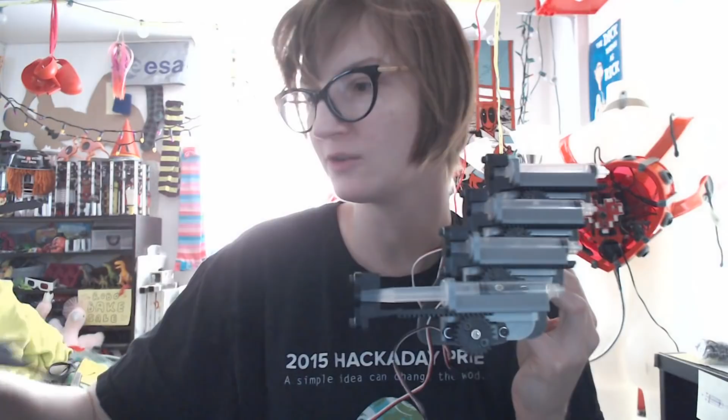But the stipulation with this is that the plunger of the rack and pinion does poke out, maybe like 2.5 to 3 inches. I don't use imperial, but let's figure this out with calipers. About 60 millimeters. So these need to not collide with one another in the middle of my back.

So that's one stipulation of the thing I designed today. The other is they can't collide with, I'm gonna call it the stock mount. I'm basically going to have a stock coming out of the middle of my back. These can't collide with the stock mount either.

If I go ahead and tilt this, you can see there's a pretty decent amount of depth to it. As you go towards the bottom of the rack, that mounting junction can probably go in between, in this empty space right here. It still has to clear the plungers from the syringes up here, but they're out farther, so it probably won't be quite as big of a deal. They just need to clear something that's going to be mounted about there. But we'll see, this is going to get interesting.

And it all needs to be comfortable, so this has to go on my back and actually not be a pain in the ass to wear. A lot of these augments I'm creating are miserable to have on my body for any period longer than about 15 or 20 minutes, so I'm trying to be a bit more mindful of how they feel once they're on my flesh meat. I'm going to try and be mindful of the design.

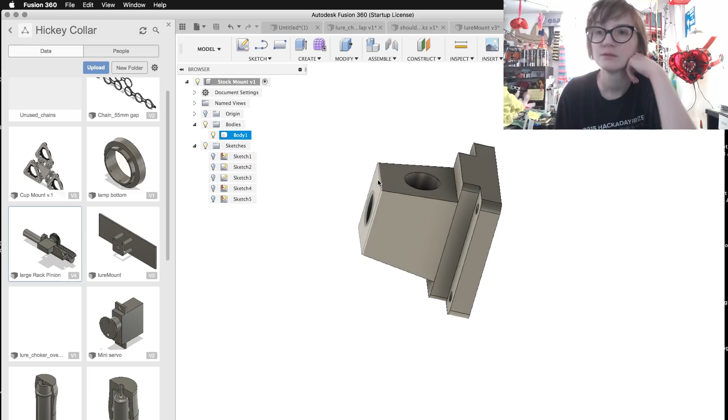Alright, back to Cadville. Alright, so I have this piece. The way that it's going to have to mount is that this face right here is going to go facing towards my back, and this face right here is going to be facing away.

And if I switch over to... There we go. So I made some spacers here that will close that gap, and there's the stand-in mounting plate. This is so far away from the mounting plate because in order for this thing that's coming out of this hole right here to clear up and over the back of the plate, it has to be this far away from it.

So I made kind of a spacer piece right here. This is probably going to be connected to or part of the plate.

They will be one in some capacity, so these spacers and this piece are just bracketing onto it. And then perhaps this block is going to be what mounts onto the mounting plate. I'm not sure, but it does need to be that far away, and I don't think I have hardware that's long enough to span a spacer that's just the length of these two pieces.

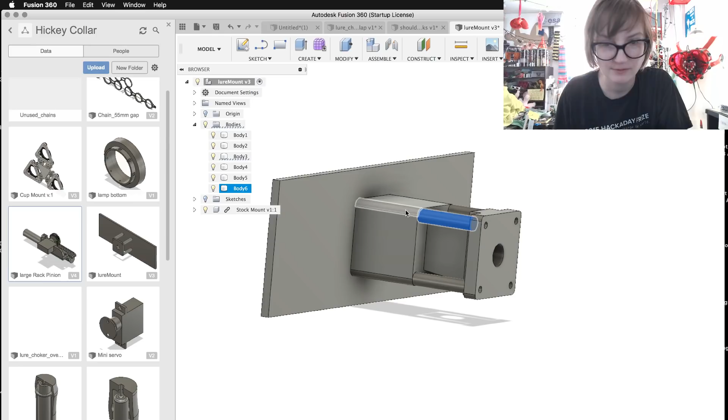Well, I can actually see. That is 78 millimeters of gap I would have to close. So I don't have hardware that long. I don't think that's a wise route to take anyway. So I'm not gonna do it.

And then on either side of this thing, this is the potential space where those racks are going to mount in some capacity. But I want to figure this part out first and make sure that I'm completely okay with it.

So this is going to be, since it's out so far, pulling on this quite a bit, which I hate that it has to be that way, but it does, which sucks.

To show you what I mean, I can actually probably go get the part. Let me show you what I'm working with, and you won't have to wonder what I'm talking about.

Alright, this mechanical arm right here. So at the bottom of it there's this thing, I don't know what you'd call it, and that is what goes inside of this hole. It has to go into it this way, so I can't spin this piece around and mount it here, because this collides with the lip of the mounting plate and it doesn't seat all the way inside. So it has to be situated thusly, which is okay.

Sorry. I'm so sorry. Cool.

Okay, I'm not gonna switch the cameras because apparently I forget to switch them back. I need to just get another screen. We have other screens, that's the thing, like we have the tools, we're just too lazy to set them up. There's a screen like right there. Okay.

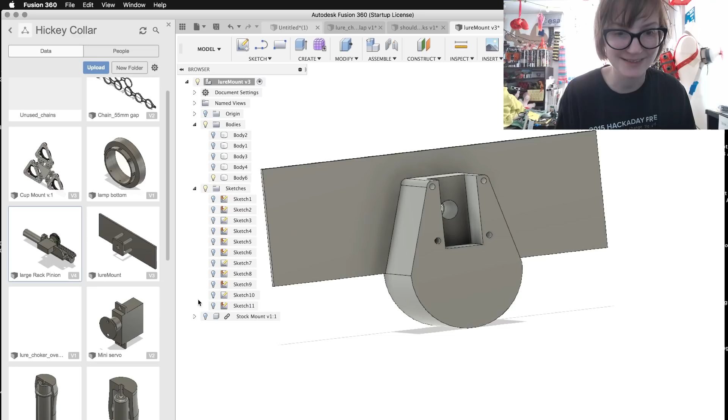Okay, so there's this really ugly blobby shape. Was that all the CAD I did for the entire stream? I didn't show it. Is that what I just did? Probably. Great. Alright, so this shape is this shape. I made that before I started streaming.

I'm trying to socket it into a mounting plate that has support underneath and support from behind, and I can stick hardware through these holes, and it's butted up against something on this side of the shape, and it's a happy thing.

So these two things marry together. This part slides in from the front into this little scoop, sockety thing, this little cavity I guess. So it shoves into the cavity, and then the hardware goes through these holes from the back, and it's just sort of in place.

The only thing I was concerned about, that I said you couldn't see because I'm an idiot, is the span of this is quite a bit. So the hardware would have to go from this face to this face, and that's like 91 millimeters, which is a lot. I don't know, do they even make hardware that's like 100 millimeters long?

Do you know, Mark? Do they make that? That's long for a screw, yeah. So they're going to be weak. So for an M3, probably not.

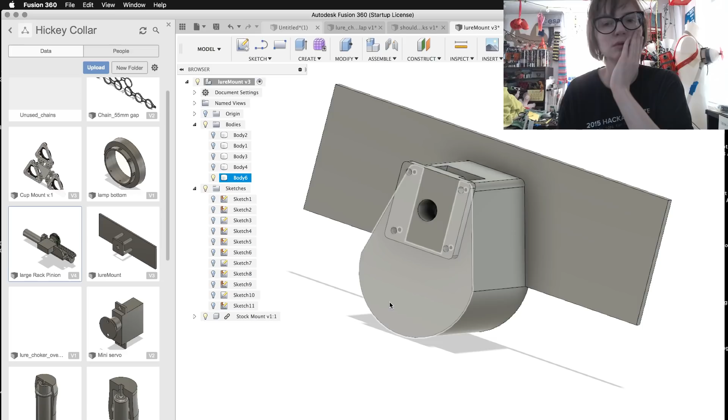But threaded rod, you can get threaded rod in any length, and then you're just going to have to put nuts or a cap nut at one end, and a little bit of Loctite, and you can create the nut-screw fastener that you're looking for. Make a nut. Yes, you can make nuts.

So this has to be this far away from the thing. Again, because the stock coming up and out of this big hole right here, part of it arcs back in towards the plate, and if I had the plate any closer, they wouldn't clear. So it has to stick back a little ways away, unfortunately.

I was trying to figure out how to shave off part of this so that it's just a shelf holding it up and not a giant massive... I don't know what you'd call that. Half of a cylinder, I guess?

I'm so mad that I did that. I've been getting so good about other things, like remembering to plug in the actual microphone. Stuff like that.

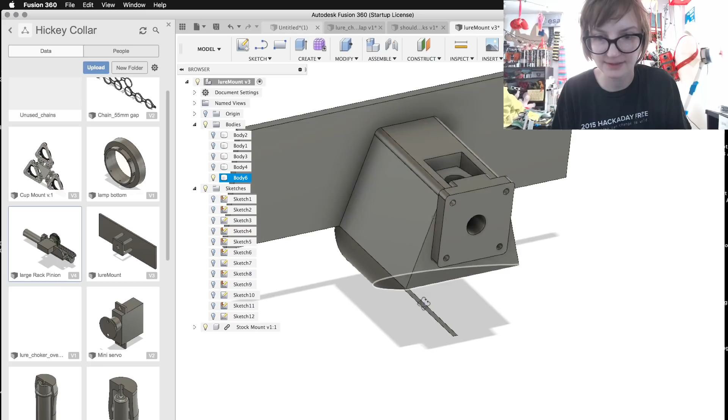Can I do this? Can I do that? I can do that. There's a little tiny oopsie piece. Just do that the ghetto way. That's not really what I wanted to happen, but can I fix that?

It's starting to look cool. Okay, that's a little better. Okay, yeah, I like that. That'll work.

Okay, so I have these two wing pieces on the side. Again, like I probably mentioned when I wasn't showing the screen, on either side of the centerpiece is where this thing is going to mount. It's probably not gonna be exactly this, but it's gonna be something kind of like this.

One of the ways of mounting it is to have it coming up off the shoulder blade like this, like an actual wing. The other way is to rotate it 90 degrees and have it coming up off the top of the shoulder, kind of like a wing but not really, like this, and then have another one going like this on the other side. So like this, or like this.

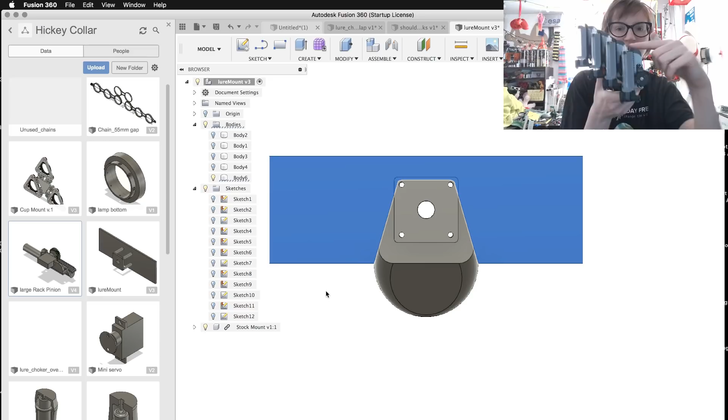The only problem with that is if they're going down, I kind of designed the edge of this assembly to look like a feather, and if it's angled in this direction, the feathers point up instead of out like this, which breaks the aesthetic. But function is more important than aesthetic at this point.

If the other way works, then that's what we're gonna do. I think I'm going to close and save this because it's referenced in another one of these assemblies.

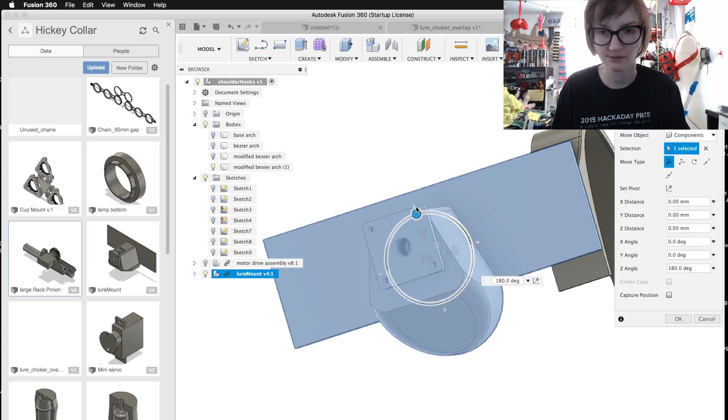And that's this. So if I wait for this to save and then I update it, it should pop in here and look appropriate. There we go. Oh, it is upside down. I never know how that happens when it happens, but it happens.

Okay, but anyhow, how are you guys doing, by the way? I asked this already in this stream, but I'm gonna ask again, and then check the chat.

Oh man, I just looked down and saw, 'Have you considered making noodle fly?' Polisqualis asked. I don't know, flying seems so much harder than walking, and walking is hard enough at this time. But maybe just attaching him to a giant quadcopter would be a faster and easier way to get him mobile at this point.

Thank you for supporting me in spirit, Vi. Oh, and again, sorry for the thing. Thank you for messaging me about it. I'm sorry I didn't check my phone, because that's not around me either.

I'm one of those crazy people that has a phone, but I don't keep it by me. In fact, I usually don't know where it is and it dies, and then I stop getting notifications to my computer, because my phone is dead somewhere in the house, and I have to go find it and charge it so I can leave it somewhere again. I've probably said this before, but it pisses my mom and my best friend off quite a bit, because they're always trying to contact me just to chat during the day, and if my phone dies, they're like...

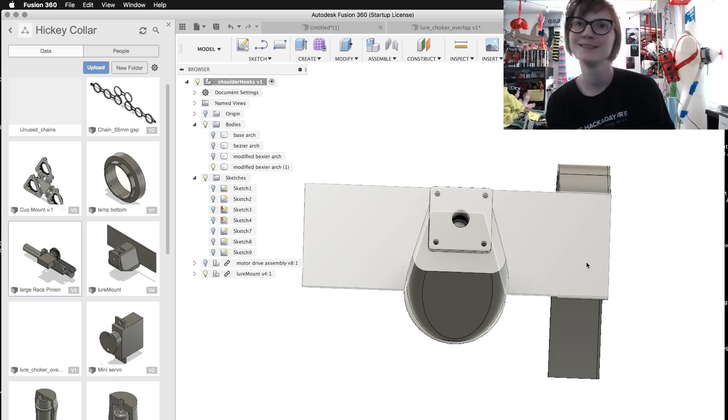I have so much lighting stuff. I have backlights for LCDs, lighting strips, halogen. What do you want? Something we can integrate. We have that light - that's a nice blue for daylight, and then do a warm one for night. That's what I would do if I were you.

No? Is it too much for you? Too much effort? No, not effort, I just like the natural light in here. I know you said you can mimic natural light, but then you need to aim natural light at your face. That's why I'm saying an LED light that's blue will match the outdoor blue light and you'll look fine. I'm in darkness, all right? You should think about that.

Okay, I'm gonna draw more.

So the other thing I've been knocking around in my mind, all this talk about lighting aside - streaming is... I envy people who have a second work setup just for streaming. Where could I work in this room? There's the space behind me for assembly, my bench for soldering, Mark's bench for soldering, and the main big table for assembly in the middle that's completely covered in stuff. Then there's Noodle's room right there, and my computer desk and Mark's computer desk. There's all these spaces and they're used, and they have good lighting because there's windows everywhere that light all the stuff.

But relocating things on the spot is difficult because there's no place to set stuff. We do have a bunch of lights in here - those blue ones we move around quite regularly. You could put them right here and aim them at you. They're really harsh, good for some lighting, but you want a diffuser, so make a diffused light out of what we have. We have diffusers, LED panels, all kinds of stuff. I would make something that fits on the desk, or get a second one and put it on the other side.

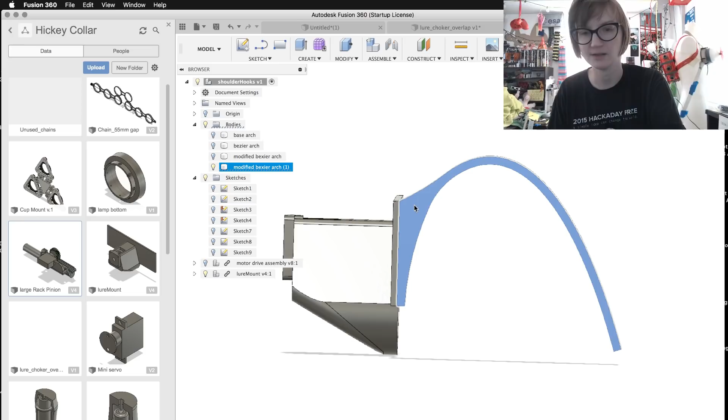Wow, I can hear myself. This is weird. Capture position. Alright, make cables. Alright.

So I drew something to explain something, and then I never explained what I drew. Let me go back. I drew this terrifying amalgam.

I mentioned lights. That's what I was talking about. I mentioned embedding some landing lights inside the plastic.

That's one of the things I can do since I'm 3D printing it. I can actually make it hollow and put some light diffuser material in there, which I think I might do because why the hell not?

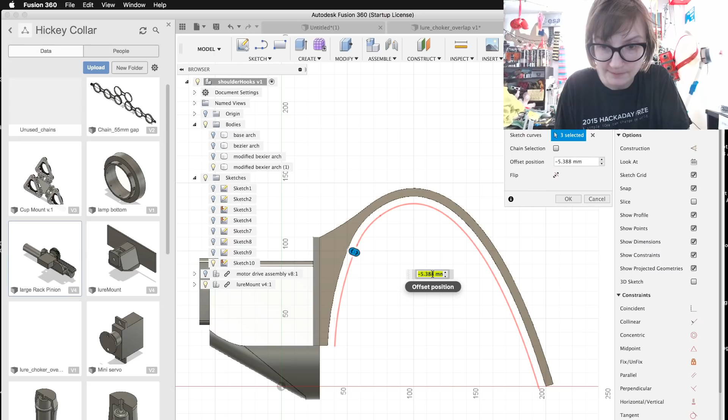Okay, so I said I'm gonna use 3mm aluminum. Aluminum, nom nom. Aluminum. Alright, I'm gonna go get my errands done.

Where are you going? Where are you going? We have banana bread. I think that will be my lunch.

Okay, so this thing that I'm drawing right now is going to represent my aluminum. Aluminum. And that can't be a fancy shape. That's just going to be whatever the stock is.

Are you going to extend? Oh, it did extend. We're not going to join. That's going to be a new body. Okay, so that's the aluminum.

Probably even change the color of this. Should we? Should I do it? Should I bother? Where are you going? Why?

What are you getting? Are there more? There's more? Are you fucking kidding me?

Getting back to the beginning of this stream, while we were getting warmed up, I mentioned this terrible thing that happened to us this week, this story about our door. What?

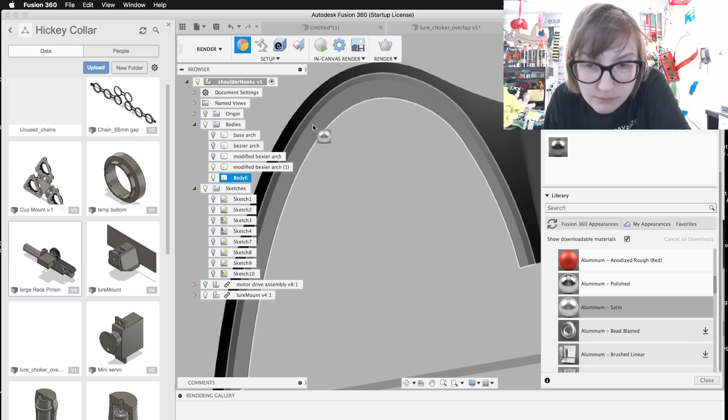Okay. Yay, now it's a different color, and I won't forget. So I think what I'm gonna start doing from this point on is I'm gonna start actually painting the parts that I know are going to be metal, the metal color, so that I can see what I'm printing and what I'm actually milling out of stock. If that makes any sense. Of course it does. Shh.

Alright, this big chunky piece is going to be printed, but the plate beneath it is going to be aluminum. Why are these separate entities?

Okay, and then I'm going to shut you off, and then I'm going to get rid of you. Wow.

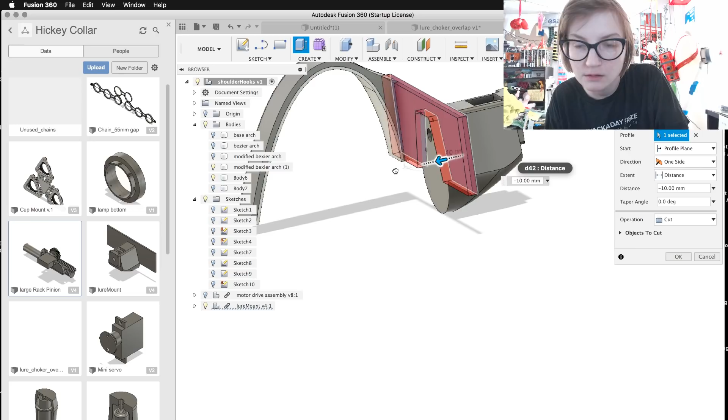Why is it not wanting me to do that? Cut. Huh, it does not like it. Interesting. I'm not entirely sure why it does not want me to do that.

No target body found to cut or intersect? Wait, really? Oh, it attached that. Oh. Wait, oh no.

Oh, that's because it's on a different... Oh, okay, that's this, that's a different thing, okay. So I can do that here, right? Right? I'm not losing my mind?

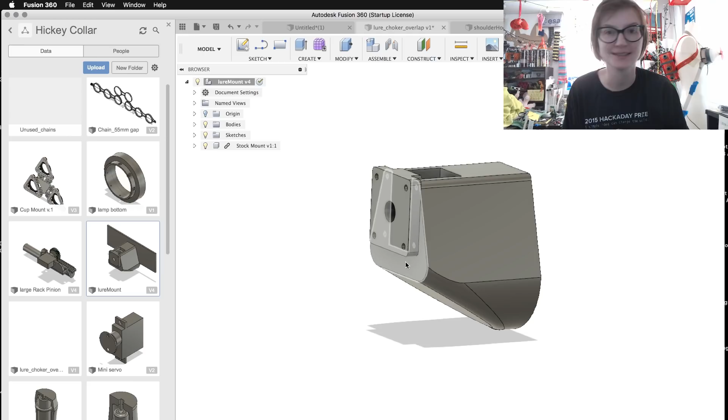Yes, okay, alright, fuck. I hate when I import shapes into assemblies and then I do shapes in those assemblies and then I try to edit something that's just been inserted into that file and it's like, what are you doing? That's a ghost. This is a ghost in that file.

Okay, so I tweaked that. It has holes. Probably put some holes down here too, but I'll do that later. Alright, let's save that. And then if we go back to this and we update it, this giant chunk will actually fuck off, finally. Sorry about that. I get confused so often.

Okay, so we can turn this back on now. No? Oh. Oh, okay, I see, I see what it's getting at. Okay. Okay, okay. Interesting. Huh.

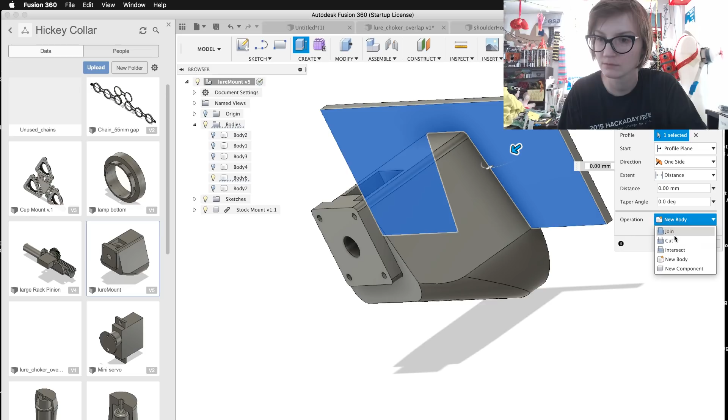Let's try that again. The confusion intensifies. I think that is what I wanted. Okay, so how thick is this? Five.

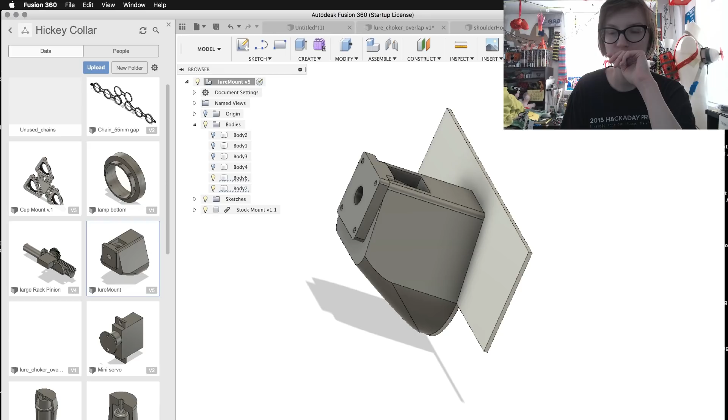So I'm gonna save that, and I'm going to update this, and hopefully it fixes or does what I think it ought to. Maybe? Cool, it did. That makes me happy.

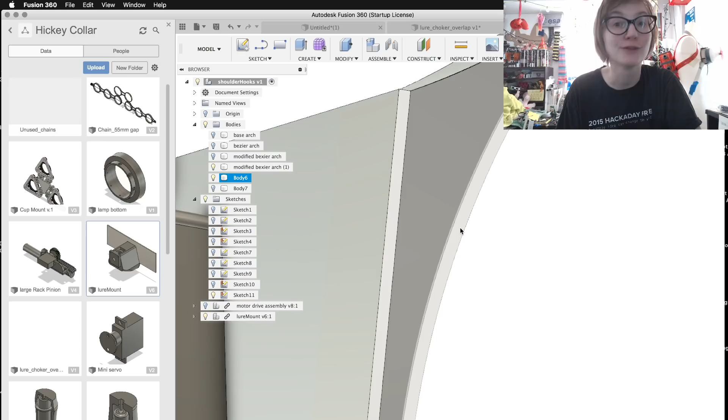Alright, so the two lighter gray pieces are my aluminum, and the darker gray are going to be 3D printed. So if I zoom in here, this plate is a flat piece of 3mm aluminum. This is a bent piece of aluminum, 3mm aluminum. It's probably going to be difficult to match this curve precisely, so I might have some spongy stuff in between to kind of close the gap, because I don't have a lot of faith in my ability to bend metal with a vise or otherwise.

This part's gonna probably be... I don't know, this is gonna take some trial and error. But we shall do our best. I will do my best.

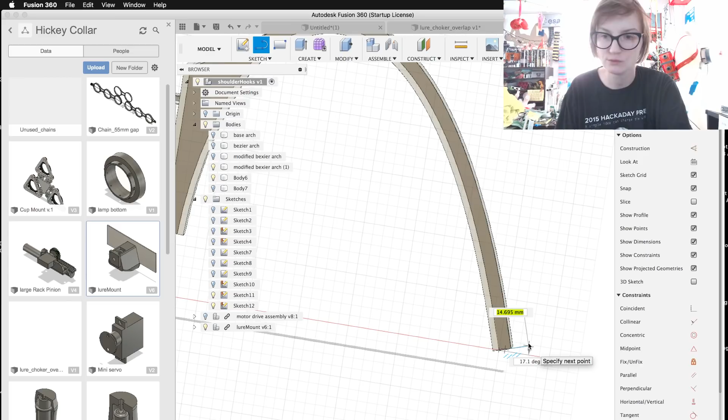How could I do that? I'm gonna meditate on that. I don't really know what that's gonna look like yet. Not sure. It is an unknown. What I could do is say, extend this to 16mm? Yeah. And then if I do...

How to continue that. Offset. That looks like it's 10. Yeah, and then just continue this directly into the termination point. That would do something.

Okay, so this could be a cavity in some capacity where I could build in some windows with light diffuser material and then have LEDs jammed inside so that the straps on the top would light up. I don't know if that's necessary. It's probably not. It's probably a bit overkill.

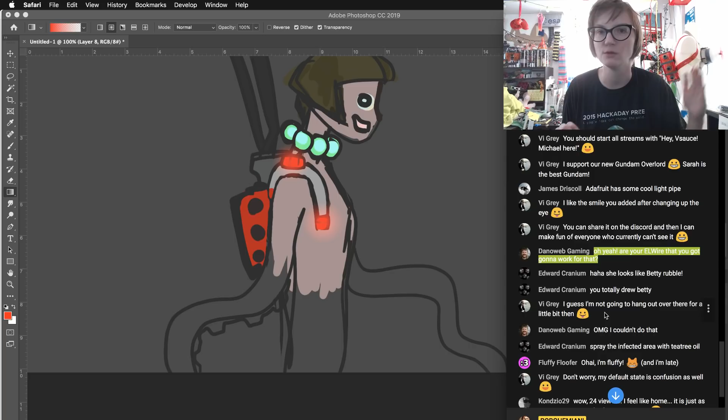And Mark sprayed Raid in the bedroom, which was stupid because now the room still smells like bug spray. Not super strong, but it's not pleasant. Normally we don't have bugs here in Vegas, like zero, no mosquitoes, no nothing really. You don't see them that often, but every so often, when it goes from hot to cold or cold to hot, things will decide to come inside because they're uncomfortable and they run amok and do bad things.

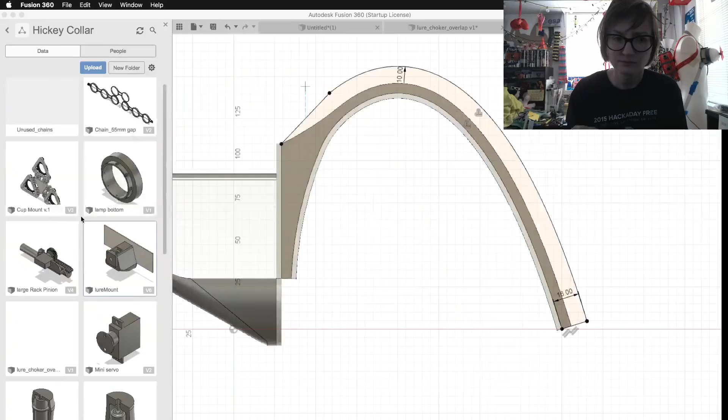Me personally, I prefer it here. I've lived in many other places in my life, and of all of them, I like the way it is in this climate. I like the way it is in this city. Other aspects of other places are most certainly better, like culture or social setting, typically better in most places, but it's a good compromise as far as what I need as a person. That being said, I would totally welcome the idea of living someplace else for a while. I just probably would come back.

I would come back. Okay, so how am I going to stick these unnecessarily blinky-do lights into these shoulder pieces? Am I going to do it the same way I've been doing all of my other stuff, or am I going to do it differently? Thinking. That might work. Then that wouldn't take away from the structural integrity of the thingy.

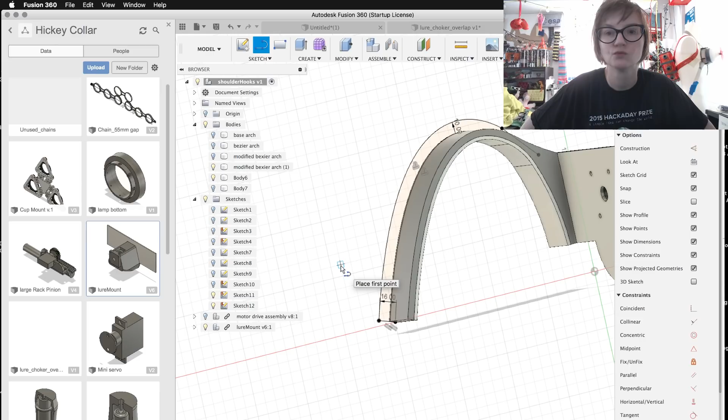Sorry, now that I'm staring at this, I'm thinking. I have this certain way that I do my light diffusers. On everything that has light diffusion inside a container, part of the Shibon project, I do it a specific way where I basically have a sheet of light diffuser material, like a thin plastic, sandwiched between two plates that have a slot or groove on either side that holds that light diffuser sheet in place. You can't do any very organic curved surfaces with that, but I'm not really going for that look with this project anyway, so if I just stick with that, it would do the trick.

I guess the question then becomes, if this is 16, that would be less than 16. This would be 10. So in 10 millimeters of space, could I fit LED strip and that's it, and my material.

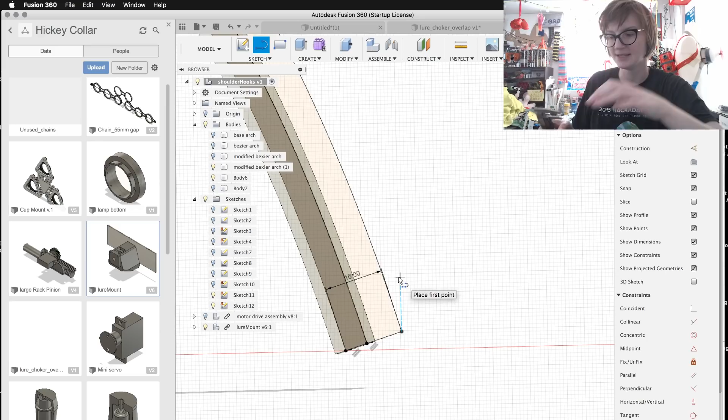Noodle says it's okay.

I'm happy that this is coming along, though. This is definitely a lot more than I had this morning when I first started molding this piece, or CADing this piece. And again, I apologize for forgetting to switch down to the desktop view.

I think I'll try and resolve the light before my next stream, and I'll also try and set up one of our auxiliary monitors on the table, and maybe get rid of all the tissues on my side of the desk and replace it with a second screen so I can at least see what you're seeing and the chat constantly instead of having to switch.

It's weird the things you make do with in life just because you're busy with other things. There's certain things that have been an inconvenience in my daily life for years, but I've just kind of built up a method of coping with them. So instead of changing them or taking the time to fix it, I just become numb to it. You know what I'm talking about, we all do that, right?

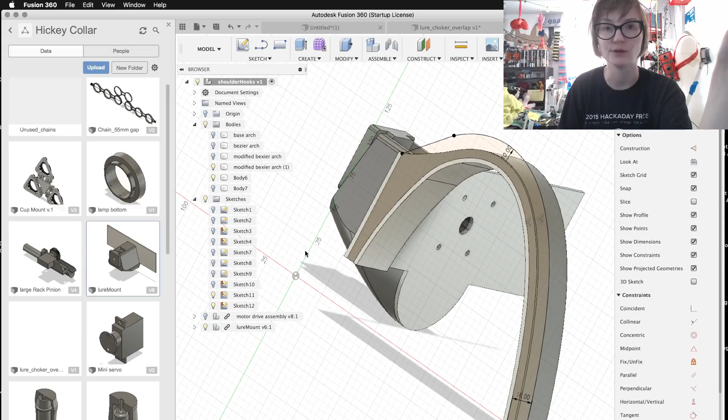I'm definitely going to play some TF2 later on tonight. Does anybody else play TF2? That's one of those weird games I've been playing forever, like since I was in college, I want to say. Because it's been around forever, like ever since they released it for Mac I've been playing it that long. It's the game that no matter what I'm doing in life, I will run back to it, at least for a few weeks a year, and regain sanity through its insanity.

I think I am gonna do the light on the top, that is to say coming up and out, because then I can just use light strip. Or no, I could still use the light strip, I guess it wouldn't have to necessarily be facing out, I could do either way. No, I think it'll look... I could do both.

How cray-cray do I want to get with this design?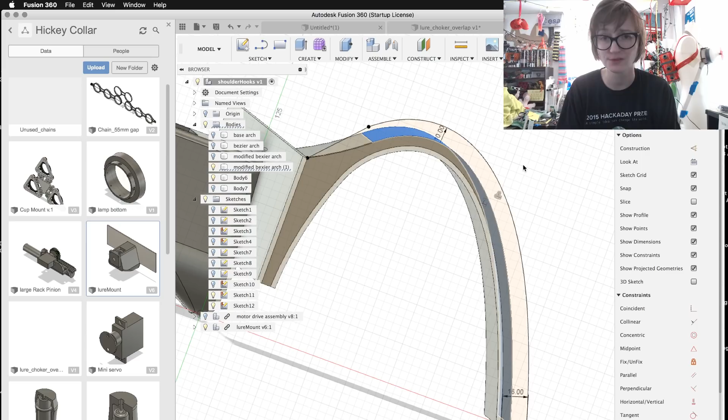I've done crazy shit like this with some of the other augments. Like the most recent version of the beatbox, the salmon cod piece, has a lot of glowing facets that use light diffusers on the edges of surfaces and stuff. I had to get really creative with the frame structure that holds all those little light diffuser pieces, but the payoff was really nice, the finished piece is kind of lovely to look at. It was just a bitch to CAD, but since I've done it once and I know what went into doing it, I could probably pull it off with this shape a little bit easier if I so chose. Maybe?

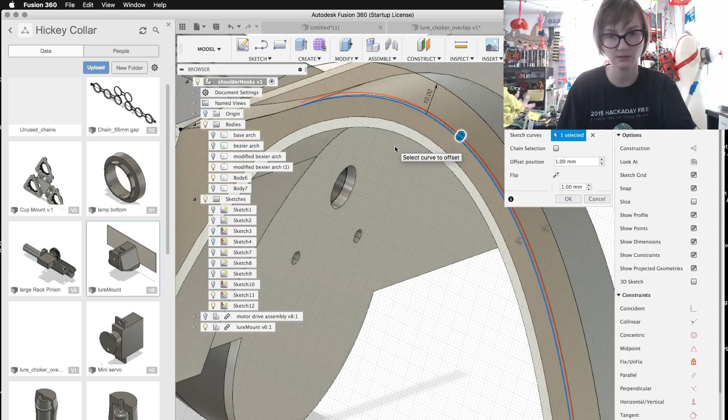Can I do that manually? Okay, 10. So 10. No, didn't want to do that. 9. Thank you. Okay, and then the channel needs to be, I don't remember, I believe it's... I'll be right back, I gotta measure something.

We'll just do another millimeter. Or 0.8. So that would be 8.2. Yeah? Okay.

And then I have to close these off. Following that line, 1 millimeter. No. Jerk. This line, 1. No, also not correct. Why aren't you listening to me? Line.

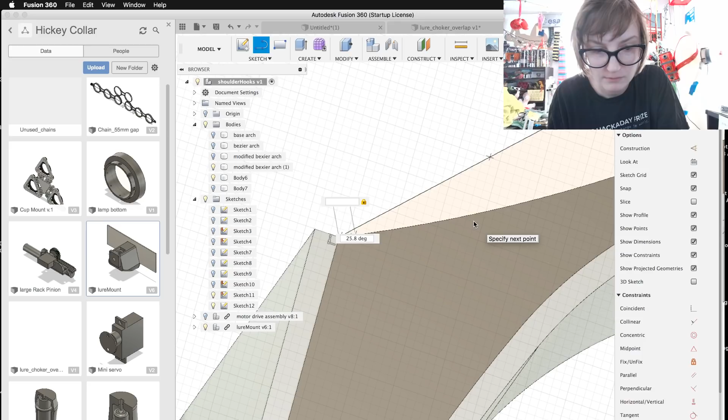Here, we'll just... screw it. It's gonna be sassy like that, then I'll just force it. Okay, so that's roughly... those over, whatever. Okay. Don't care.

Okay, so this thing right here, that's the channel. It's going to be a slightly deep groove that the light diffuser material is going to kind of seat inside of on either end. And then this will be a cap. Maybe even that too.

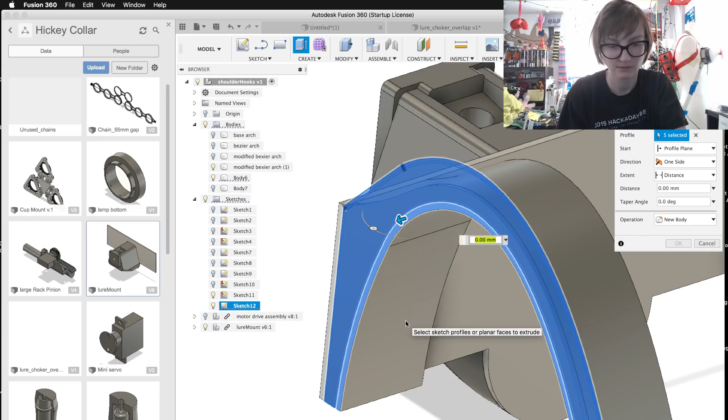New body. I'll make that 4 millimeters thick. Did it obey? New body. Okay.

So that is 4 millimeters thick, and I'm going to turn this sketch on again, and this groove that we created is going to be -2. Cut. Does it not want to? Why? Why? I'm offended.

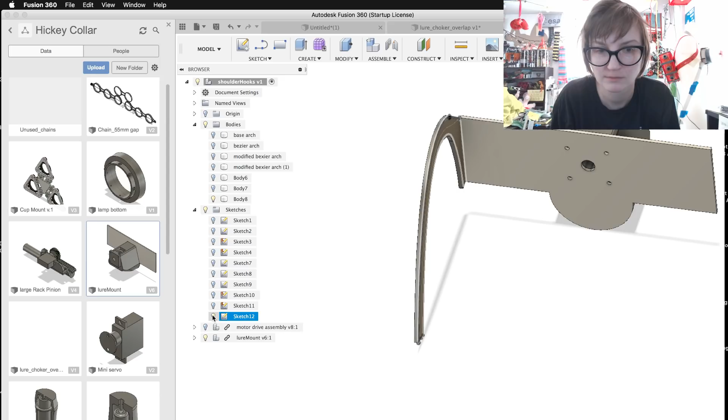Alright, let's turn all of those things off just so we can look this thing in the face. Okay, oh, this isn't connected at the end, so that's problem-y. No. Also not what I wanted you to do. Is it gonna make me? Oh, I hate when it readjusts. That is not, anyone else find it really aggravating when it force adjusts? It repositions the screen thinking that it's helping you and it's not. Okay.

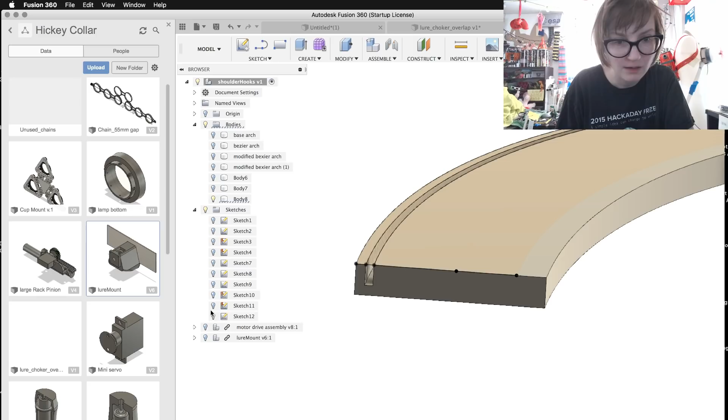There's our groove. Okay, so that's the channel, and this probably doesn't even have to be so thick. There's the channel where the light diffuser material is going to slot. So if I slowly turn these layers back on, we don't need, that's our aluminum piece, that's our 3D printed guide and plate adapter, I guess. What is that? Oh, and then those are just old versions.

Okay, so this is seating on one side, and then I'm going to mirror this thing and put another on the other side. Not faces, bodies. This body. This face. There. Okay, and then I'm going to move this so that this point touches. Nope, that's not correct. So that this...

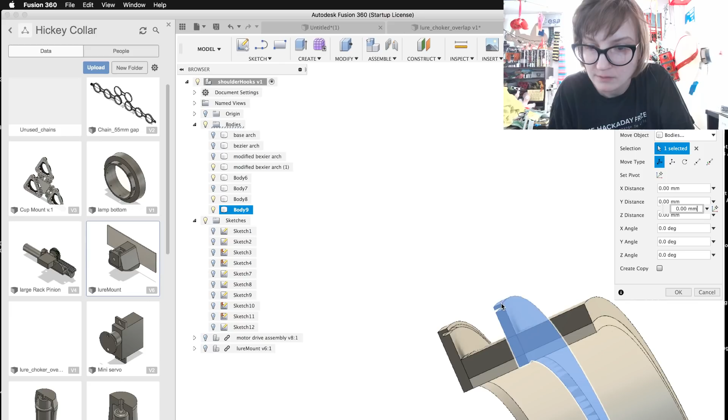You know what? Screw it. This point touches that point. Okay, there. Okay, so this slot is going to be where the light diffuser goes, and then beneath it, that is where the light strip will go.

This piece right here, this plastic piece, how thick are you? 6 millimeters thick. That might not have to be quite so thick in that part. Because that 6 millimeters is pretty thick. I might reduce that by 2, and then I'll have a little bit more gap in here for the LED strip to seat, and then the light will be able to diffuse a bit more, because I really don't want there to be bad light points going down the shoulder.

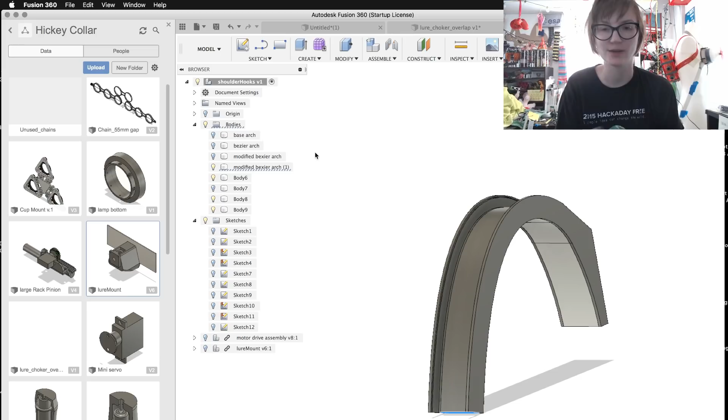And then I'll probably have this terminate in some interesting way. Like I'll probably create a little light bulb container thing for the end of these tracks. I don't know, something that looks kind of like a bike reflector or a bike light, one of those little fin things that pokes down. I don't know if I'm describing that very well, but that'll probably go on the end, and it will sit right here on the chest. So I'll have like blinkers.

It occurs to me that I'm not going to probably be able to wear this thing with any of the bras, because they're all kind of big. Maybe not.

None of this stuff, I don't think I'm going to be able to put the entire outfit on in its entirety from the get-go. I think the first iteration of all these exotic things I'm making won't be compatible with one another from a wearable suit standpoint, but further iterations will strive towards that. These are all still, I want to say, first versions, just a proof of concept at this point, so it is what it is.

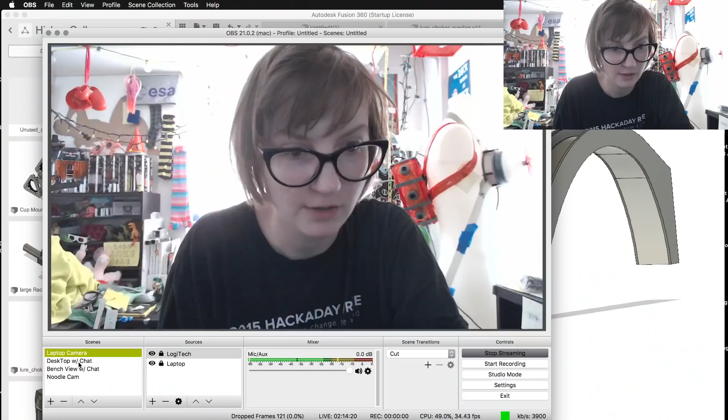Okay, and look at me remembering to switch back down like a good kid. There we go. I'm gonna check the chat. Oh, here, you got them. Good, good, good. Good pizza.

Oh cool, Dan G says they also play TF2. Yeah, I think anyone who's ever played has like a zillion hours logged. I can't believe it used to be paid, that blows my mind. I only ever played when it was free to play, and it was just a free-for-all crazy fest of collecting hats and doing dumb stuff, of which I have a bunch of hats. Every so often, like once a season, I'll spend $5 and get 2 keys for crates, and I invariably get something valuable that I can sell on the market for a decent amount of money, and then I spend all that money on cosmetic items for my pyro, because I play as a pyro.

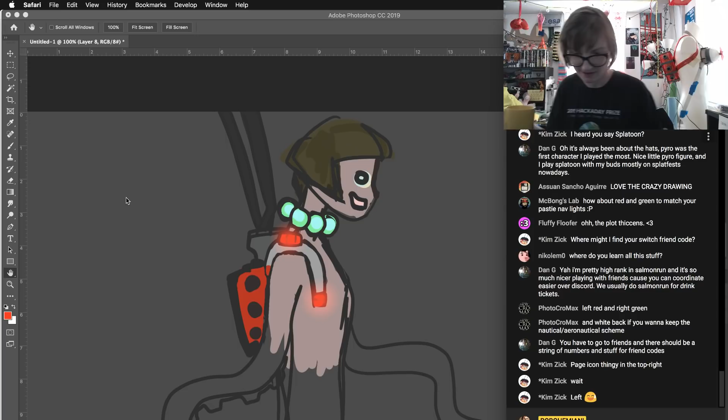Yeah, this is where it's gonna get hard. I did all the easy stuff, and now I'm going to make it unpleasant, and I'm probably gonna open a beer here in another hour if I'm still doing it. So if I'm still fretting over adding the rack by like 3:30, 4 o'clock, then happy hour starts an hour early.

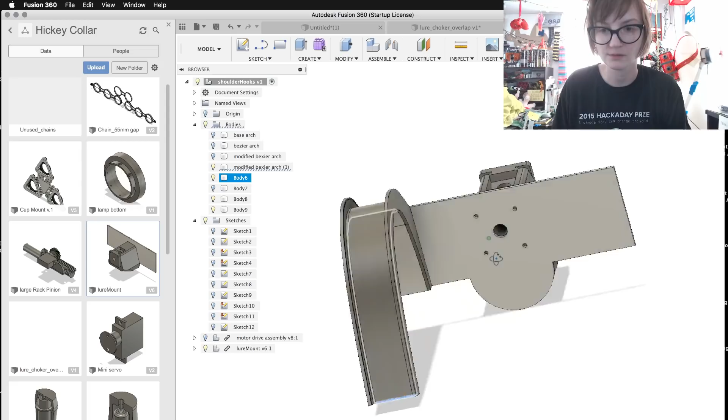So those are my arm shoulder pieces, tentatively, with space for a light diffuser if I choose to go that direction. And then there's this plate here on my back. I'm hoping it's in the right position. I think at this point it would be wise to print some of this out and see if it's even lining up where I think it ought to.

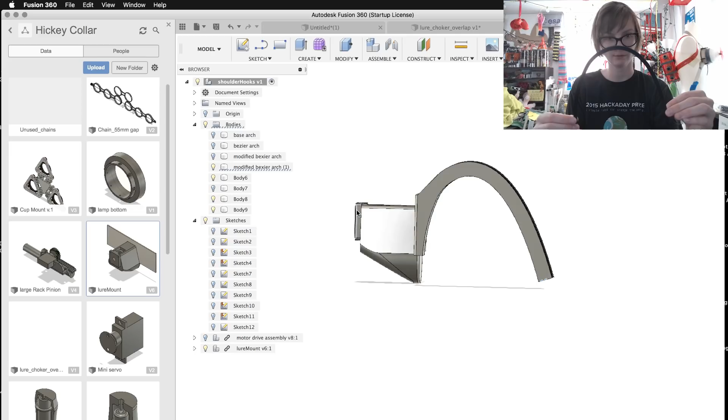I mean, I did kind of test it out with this thing, but it's probably still not enough testing. That's actually... that, which I cut. It's actually probably not a bad idea. I'm gonna print one of these sides just because it's a convenient enough shape. Actually, we'll take this one.

I'm going to copy and paste it, and turn everything off for the moment except for it. I'm going to reduce it, or maybe I won't — it's only 3 millimeters thick, it's probably good. No, I'll reduce it by 1. Okay, that'll probably be enough. Alright, I'm gonna print this, because this is my rough shape, right?

And I'm going to see if this still fits the curvature of my shoulder the way I think it ought to, and then I can also get a feel for how big that back mounting plate is because of this flat face. Granted, I'm probably gonna have to go stand in the bathroom and try and look behind me into the bathroom mirror and get a sense of how that's working out for me. But it'll at least let me know that I'm on the right track before I commit too hard to any of these shapes and dimensions.

So let's save this as an STL. Let's save this as... that's probably fine.

Here, you guys can look at me for a second while I set this up, so you don't want to see me attempt to... oh god. Oh, that's right, I have like a million-hour print going right now. Alright, well then I'm not gonna do that now. Fuck. I'm printing the next set of... sorry, I'm trying to get back to someplace meaningful.

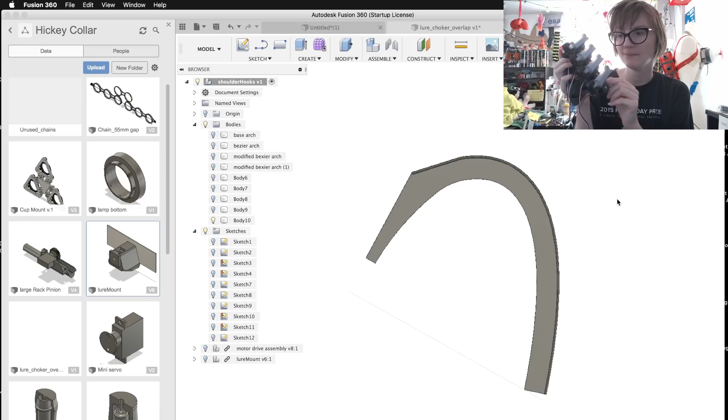So I'm printing the silver pieces right now on the printer. 4 of each set, said it was going to take 8 hours to print, so that's not going to be done until like 7 tonight, because I started it right around the time I started the stream. So yeah, I don't get to do anything else for the rest of the day, which is fine. It is what it is.

I'm gonna rename this so it doesn't get buried. Okay, so these are my capture pieces. That is a mounting plate that I'm not using.

I think that is my aluminum shoulder hook. What is this? That is... shoulder hook adapter? Sure, that's what that is. Sure, we'll go with that.

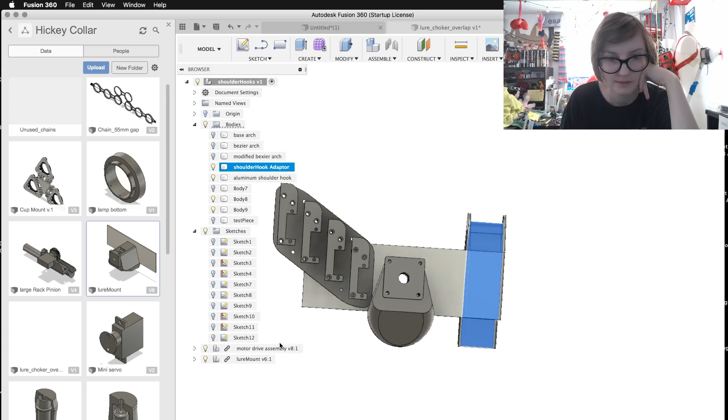And then there's that, and then... oh, how am I going? There's that thing, it's the bracket mount. Ooh.

15 degrees? I could do something like that. So that would be like this. That would be like that. So the only problem is the plungers would be poking out, which is probably good - I wouldn't have to worry about them colliding. But then the syringe tubes would be going in towards each other, which might not be such a bad thing because I could have them overlapping.

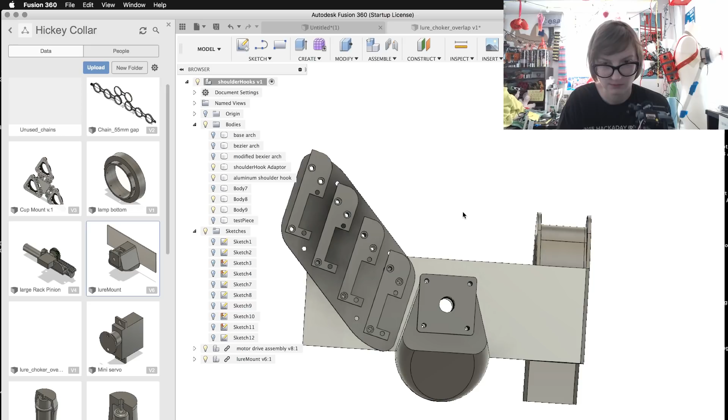That's not doable. That might be doable. Yeah, that might certainly be doable, maybe. So the other thing I could do is I could have this thing... it's a little better. I could have this thing do something like this, so they would go down and it would flank that line, contour, whatever.

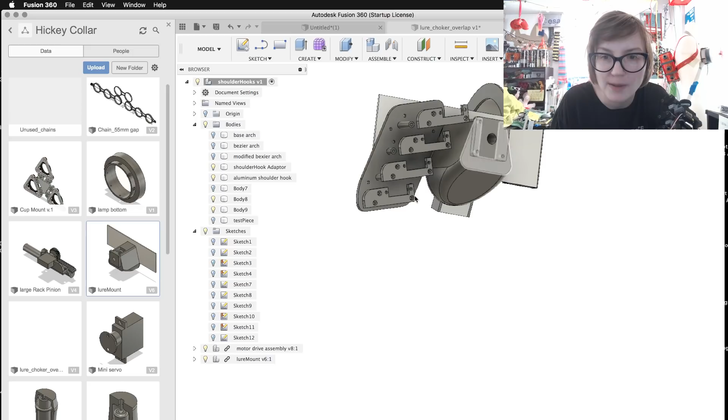Because I think if I look at this from the top, those ones in the back are actually seated higher up than the ones down here. The question is, would they clear? And the answer is no, they would not. They would bang right into that part, so that's not a good solution.

I could do something like that. There's a way that I can make this a bit easier on myself, and I'm going to do it. Okay, so I'm going to open up this assembly and turn all of the things on so that they're actually there standing in place for the thing that they're supposed to be standing in place for.

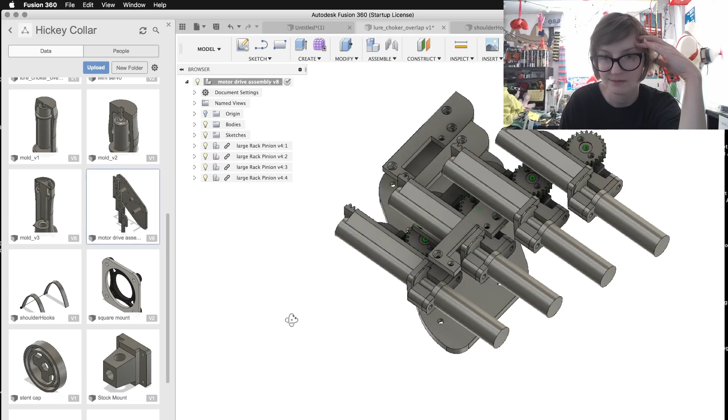So that's this. I'm gonna turn all the rack and pinion assemblies on, which are these guys. Oh no, why are they rotated weird? 90.

Okay, that looks about right. Okay, so this is the plunger fully extended, so this is roughly about the amount of space that this whole assembly takes up. So this will help me visualize a bit better whether or not I have part interference. If I remember correctly, I had a difficult time getting...

So I think if I update this, it won't update correctly for some reason, which is why I turned them off. But we'll see, they might just obey. So if I... ah, yeah, see? Isn't that nuts? So I don't know why those are offset by that amount, and I'm not quite sure why. It's like, what's that?

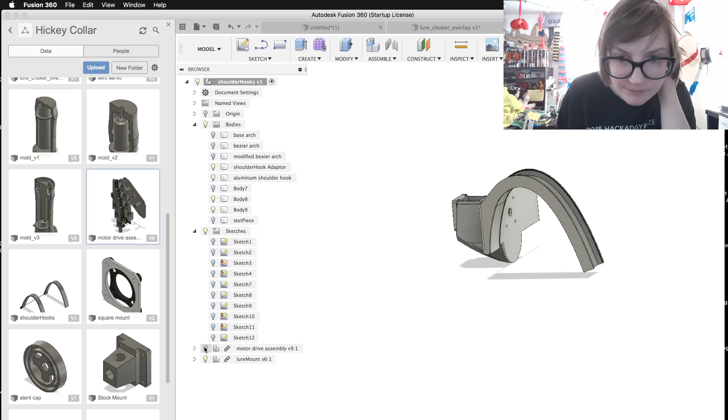Can I move them inside of this? No, I can only turn them on or off. That's annoying. Yeah, I'm not quite sure why it does that. There's probably some explanation, I just don't know why it's messed up like that.

Maybe if I'm gonna re-import those assemblies and just delete...

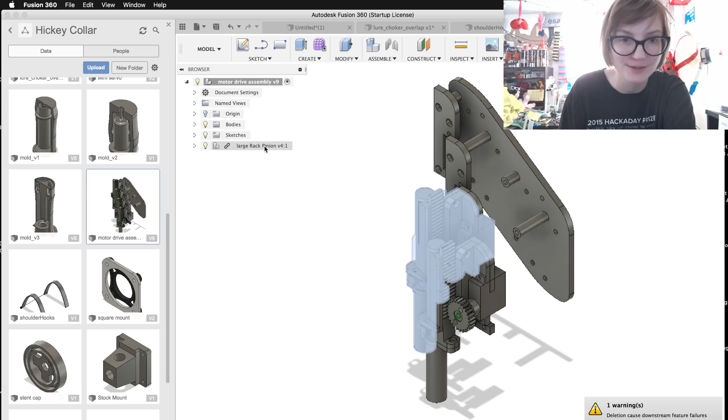It's doing something. See, this is how I break a bunch of shit in my thing, and then it no longer works. Because I see things popping up here, it's like, wait, what are you doing? Don't do that, stop. And I'm doing it anyway, because I'm a horrible monster.

I guess I didn't have to delete those. I could have just turned them off and then imported new ones, but we'll see what happens.

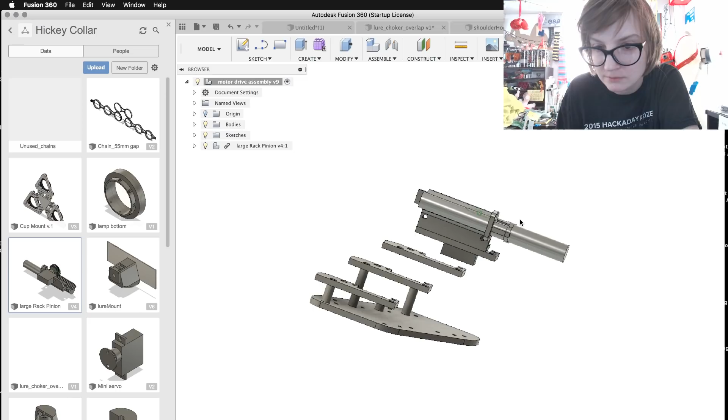All right. Point to point. Oh wait, this is rotated incorrectly. And now point to point. There we go. Is that correct? No, wrong point. There. Okay, that is the correct point.

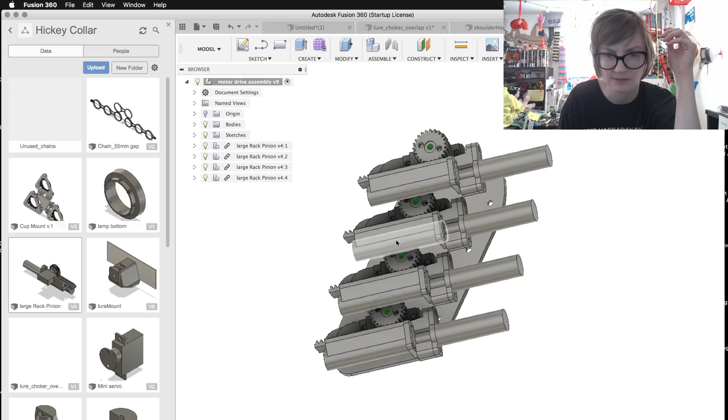I feel bad I didn't mention this earlier, but the boards I did layout with Mark last time I streamed - we sent those out to Fab on Saturday, so they finally got completed. He finished his and I finished the 2 I was working on, and they're in Fab now. I think we'll have them in another week to 10 days. I posted some screenshots of what they look like done on Twitter, I think. They turned out pretty nicely.

All right, let's see if this does what I think it ought to now. Yay! Cool. Okay, so as you see, there's definitely totally interference - like massive interference there.

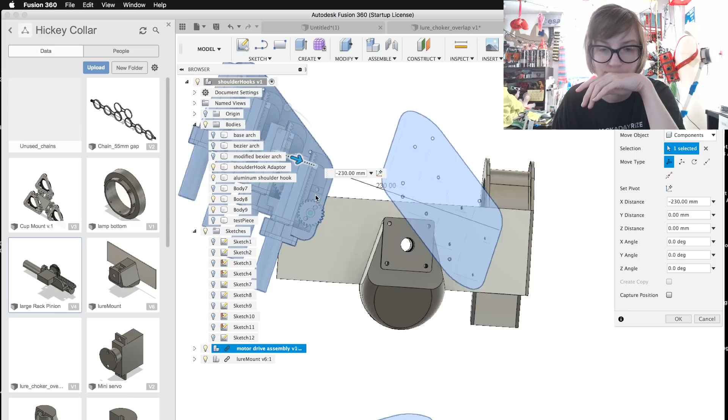Okay, so it does make sense to have these angled the way I originally thought they'd have to be angled. Let's free move this thing - which was more like, I think more like this. So the plungers would be going down and out, and the tubes, the pneumatic tubing, coming out the tips of these syringes, will kind of be going up towards the center.

Aluminum shoulder hook, where are you? Yes.

Okay, so if I copy and paste these... me and all of my laziness.

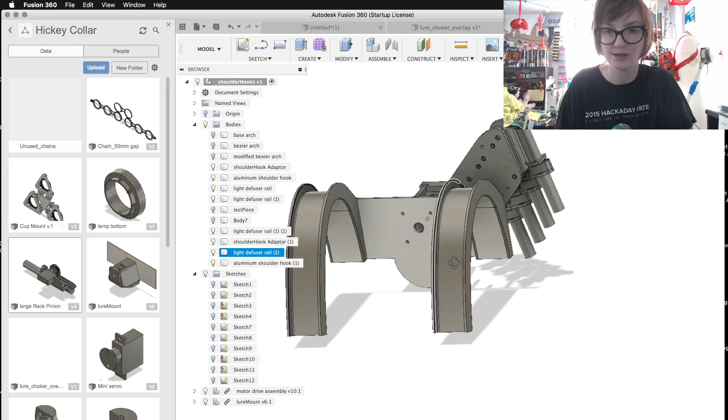Okay, we've got 2 shoulder hooks. It seems like if that is the peak of my shoulder, then there would be some syringes poking up over the top. They'd be blocked by the mounting plate, but I might shrink this down now that I know what it needs to be and what's expected of it. It looks like only a portion of it would be overlapping the actual aluminum mounting plate. I don't know if I'm okay with that, I don't know if it matters yet. I guess I could...

Do something really funky - wait, oh god - and have them mount straight up and down like this, and perhaps a little lower, like that. So that is another option.

I think that would probably barely poke up over my shoulder muscle. We never figured out what that was called - I don't remember. There was a point in my life when I was an art student where I could tell you what all the muscles in the body were named, because I used to fucking know that.

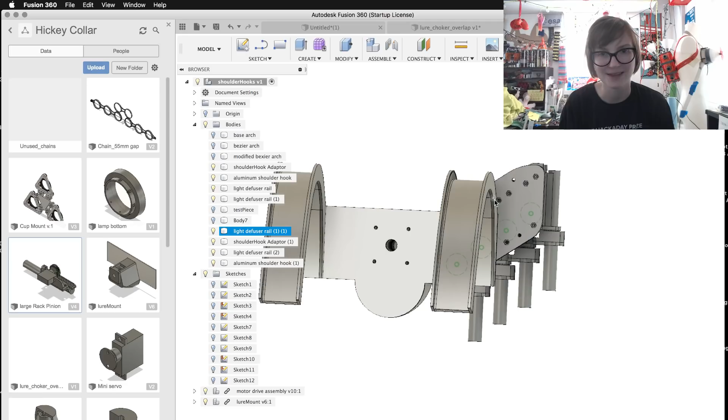Oh, because they teach you that in life drawing. If you sit in rooms drawing naked people for hours every week, they also teach you what all the body pieces are called, so you know what they're talking about when they point at your drawing and say, no, that's bad - there's no bulge where the trapezius muscle is supposed to go, and you go, ah yes, you're correct, and visualize where that lump of meat would go underneath the skin and add it in. I don't remember any of that stuff though.

I just know this is probably going to go up to the crook of where that muscle, the trapezius, twists around on top of this muscle - this is the trapezius. So this is going to uncomfortably rest and mash on top of the trapezius muscle, and hopefully not be so cumbersome that it makes me not want to wear this thing.

I don't really know how heavy this is going to be. The arm that mounts inside this socket isn't very heavy, it's just long, so I want to make sure it stays put. I'm probably going to put some sort of key in to lock it in place, to make sure that once it's in that hole, it's not going anywhere and doesn't slide around or swing or anything like that.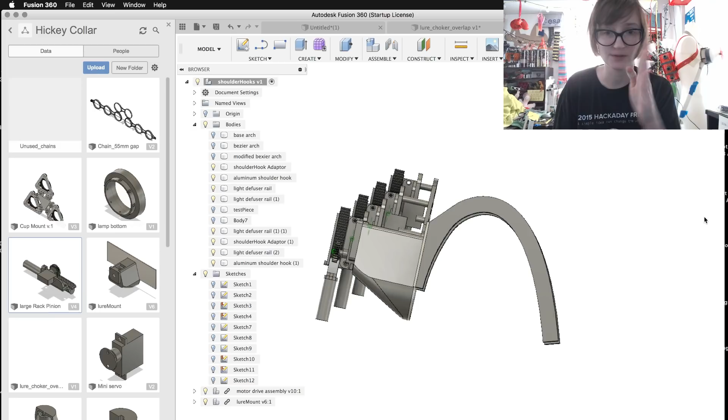Nope, that's definitely not it. Can I kind of coax it? This would probably seat a bit more like this. So if you're looking at me directly from the side, this would be kind of the angle it'd be seated at, roughly - not straight up and down, but tilted in based on the slope of my back, if that makes sense. And the light would be here.

Here, how about I do this? So I'm gonna screenshot this. Actually... and I'm going to add that.

Oh, there's the chat. I said I was gonna check that, didn't I? I did. Oh man.

Topher has opinions. Can I ask you a question here? Yes, you can ask me a question here. Martin from Wintergatan did a very good Fusion 360 video about arranging huge numbers of bits on one scene. I need to write that down. What would I need to Google on YouTube? Arranging many bits in Fusion on one scene. Yeah, it does weird stuff. Like once your assemblies go inside of assemblies, and they're layers deep, things start to act funky. I'm sure there's an explanation, and it's entirely based on what you're doing and you aren't aware that you're doing it. I don't have my brain wrapped around the entire piece of software yet.

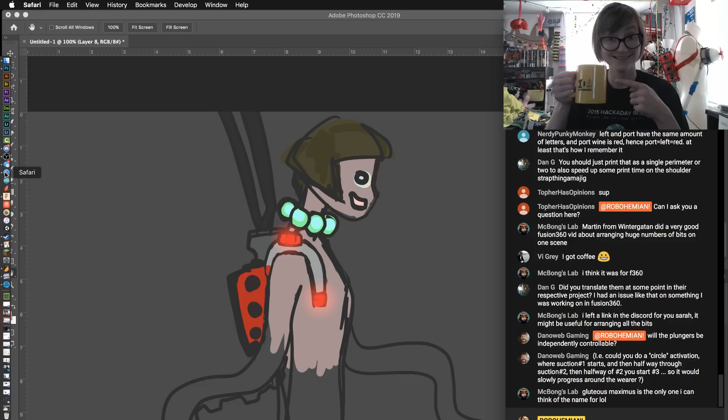Oh, Vi has coffee. I have coffee. Super important. Oh, that went right in my lap. Oh god, it's cold and wet. Damn it, I cleaned up all of my tissues and now I have nothing to...

Did you translate them at some point? Probably, I probably did translate them. They probably got flipped or something or mirrored, and I don't remember at what point I did it, and then they got... that's what it's referencing from the past. I don't know.

Thank you, McBong, for linking me the video, I'll check it out. There's a lot for me to learn about Fusion. About a month ago was the 2-year anniversary of me learning it. I picked it up kind of by force, one of my friends sat me down and got me started on it, but it was probably one of the best things I've done. That being said, it wasn't until about a year ago that I really grokked what the parametric thing was all about, and it's been sinking in slowly ever since.

Yes, DanoWeb, the plungers will be independently controllable. There's going to be 8 plungers, and they each have their own dedicated motor. Mark is picking up the other 4. I built a rack of just 4 on one side first and tested it to make sure they do what I think they ought to, and they do work. They're not super strong, but they're relatively cheap servos, so for the money it'll do for this first proof of concept.

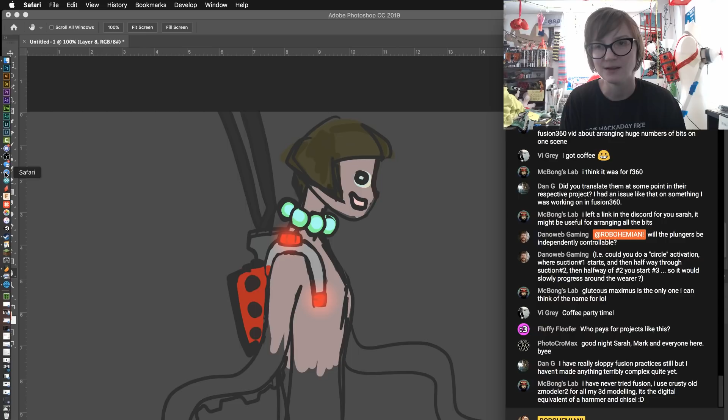No, I tend to pay for all of my stuff, and my patrons support me. My Patreon money, that's my exotic R&D fund, always. All of the support I get from my friends and patrons goes towards the things I want to play with that I'm not quite sure are going to work. I'm building up an arsenal of shapes and things that will eventually get funneled into a project once it's appropriate. But to answer that question, never tried Fusion. Currently using old Z Modeler 2, which is the digital equivalent of a hammer and chisel.

No, McBong, totally, if you can, you should definitely try Fusion 360. One of my friends, somebody who cares about me, had to practically drag me kicking and screaming by my hair to try it, because there is a bit of a learning curve if you've never used a parametric modeling program before. I'm not sure how the Z Modeler program works, but if you're willing to watch a few videos online and get a feel for it, it was the best thing I've ever done in my model making, shape creating life.

I'd suggest the best way to get over the learning curve is to take a shape you've already designed, like the most complicated shape you've ever made in CAD, and make yourself model it in Fusion. Watch a few videos to get a feel for how it works and how you'd go about building up a shape, then once you think you know where you'd start, just look up whatever videos you need to make that shape you've already made. Once you've replicated it, you're probably good, you know enough. But you need that thing you're familiar with as a goal in mind before you get started, so you have something to work towards and know what questions to ask.

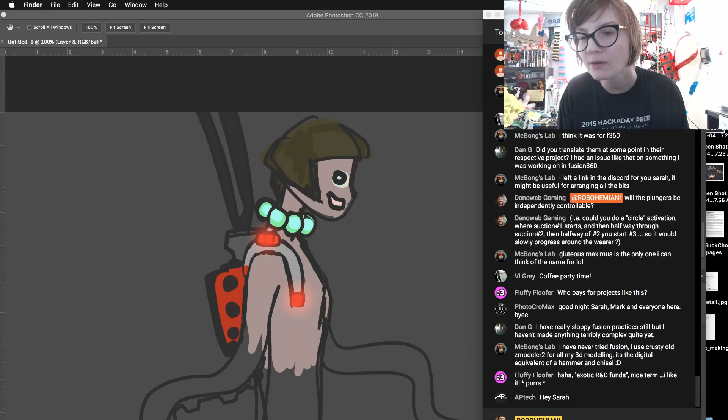But anyhow, I'm gonna switch back to that awful thing that I'm doing. I don't know, I think I'm okay with this. Oh yeah, I was gonna do... there's things I'm remembering and forgetting to do. Where is it there? No, I wonder where it went. I'm gonna dig around on my desktop for a second, which is a tremendous mess. Ah, there it is, it was there, I just didn't see it. There we go, okay. I'm a dork.

Okay, so that's gonna seat about there. If I invert this so you can see it better... there you go, there you go. So that's roughly what I drew and what I've made.

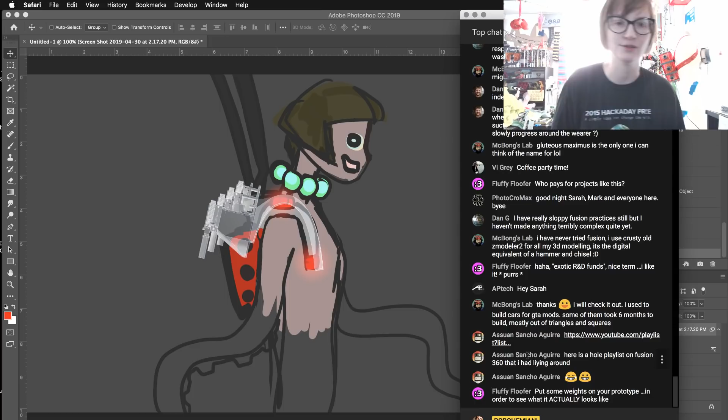No, you're right, Fluffy mentioned putting weights in the prototype, so I have a sense of what it actually feels like. I'll probably very carefully put that stock in on the hole or whatever in the piece, and I think so long as I don't move around a whole lot, the plastic version will probably hold up just fine. Then I'll get a sense of how it actually works, and if it does break, I'll know where the weak points are and can reinforce those a bit more. Yeah, I'm definitely gonna try it on and see how it do.

But speaking of, let me dig this out of my computer. I'm looking up a piece of concept illustration for the thing I'm making next after the suction cup choker, I guess the suck choker, whatever I'm calling it. So the next thing I'm making is called the lure.

It's not its name, but I'm making this arm thing. I have this giant arm, and it's going to curl over my head like an anglerfish, with a lantern hanging from it above my head, which isn't going to weigh a whole lot because I don't like the idea of something heavy hanging over my head. I'm going to fabricate a thin-walled plastic lantern with a kind of glowing filament bit for the inside, and there's going to be an arm that arcs off of that, counterbalanced, kind of like a mobile.

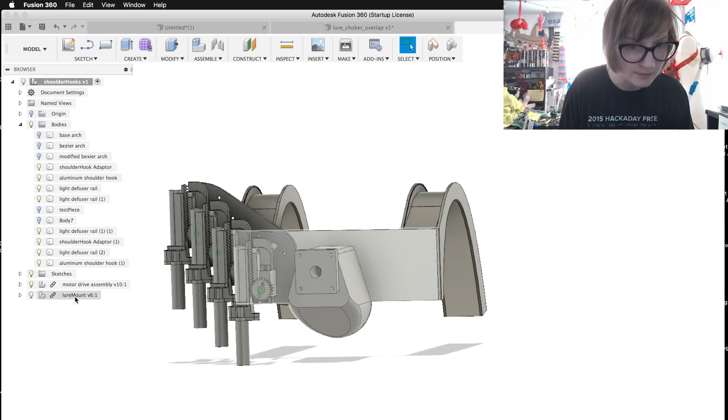So if I mirror this assembly, it's this. Modify, mirror.

Dear God, that is terrifying. But yes, that's what I want. Okay. Oh, I hate it.

We'll just put you in rough proxy. Negative 85? No. Looks about right. Oh man, why did I do that? Why? Okay. Yeah, it does weird stuff, but whatever.

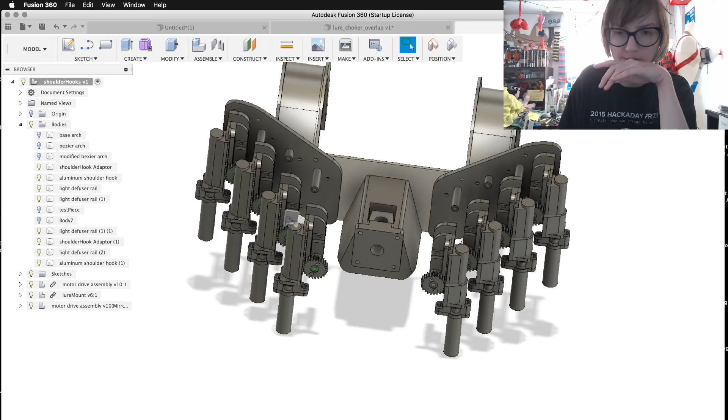Okay, so in rough proxy there's both racks of servo motors, the mount for the lure, and both shoulder hooks. So it's kind of like a jetpack, which I'm kind of okay with. And I think I do like them in that up-down position. They kind of look like wings if they were folded up, which I'm definitely okay with.

I guess one of my secret inspirations, and I didn't realize this until probably yesterday night when I was going to bed - when I was younger, I used to play 2D fighters a lot, and I used to play this... Mark's home. Or that's a solicitor.

The fuck? Oh yeah, he's home, okay good. I'm like, who the fuck is hanging outside the house? Whew, no.

Still streaming? Yeah, I'm almost done with the assembly though. So I used to play this 2D fighter called BlazBlue.

I doubt anyone has played it before or even knows of it, but if you do, awesome, that would make me pleased to know. But this particular 2D fighter, there was a character in it named Nu, who was a little robot girl who had a creepy high-pitched voice, and she...

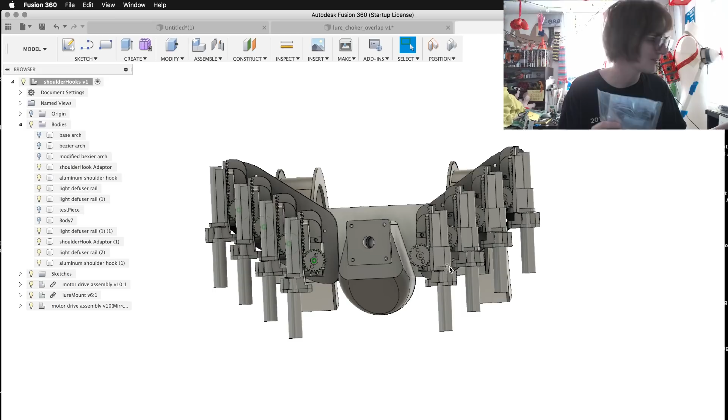So this creepy robot girl was named Nu, and if you Google Nu from a game called BlazBlue - B-L-A-Z-B-L-U-E, weird name - she was this levitating Gundam female who fought with robot wings, and each wing was made up of about 4 or 5 blades. These floating blades, like wings, would levitate behind her, and she would send them zinging out towards the enemy and attack from a distance. So she was a kind of projectile fighting style character, and I played as primarily her, and that was it.

I don't know, these definitely remind me of that. So I'm sure buried in my subconscious somewhere, my young spirit was pinging my memory of that character while I was putting this together, because I was like, ah yes, they can be like feathers, but robot feathers. And my subconscious is like, yes Sarah, robot feathers indeed. You know exactly what you want to make - you want to be that robot girl. In which case, yes, I do want to be that robot girl.

Here, let me find it on the interwebs. Sweet, I will totally check out your channel, Mr. Bong. Totally, I'm checking chat real quick. Huh?

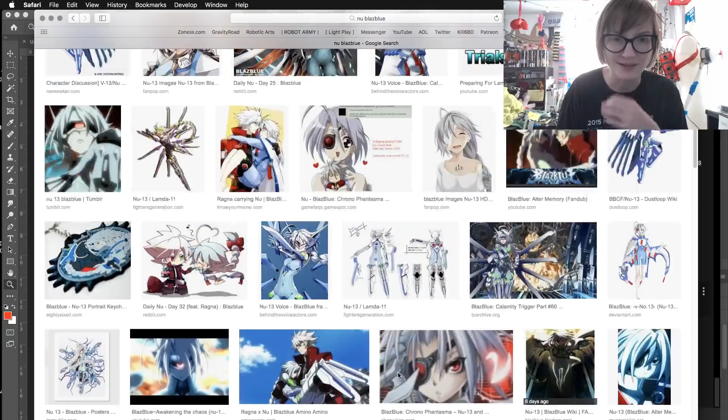So yeah, I don't know. One of these days, if I get a capture card, I will definitely do a day where I invite my friend Matt over and we'll do 2D fighting against one another, and you can, if you are interested, watch us fight each other. Because I played this game with quite a few people. I think I had the most fun playing against him - we were good opponents, components. Him and I were very good components together.

But yes, so that's what I'm talking about. But anyhow, let's see, there we go. Except now my feathers are pointing up instead of out or down. I guess that's okay.

I think the only thing left to do is decide how this actual plate is going to manifest. It probably makes sense that it's just plastic and kind of boring. I don't know.

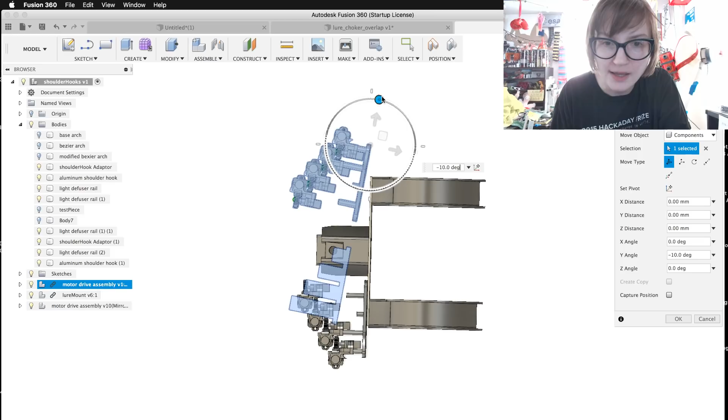I could add a spacer to it and then angle it outwards, to show you what I mean. I could make a spacer that angles these out from the center, because otherwise it would collide with my back. Probably something like this, or maybe not as dramatic, but they could definitely be presented more like that. Not as dramatic of an angle, but they don't have to go flat on that part.

I have decisions I need to make, so I'll probably do that. But it's like 3 o'clock at this point, so I'm probably gonna call the stream finished, because this is what I wanted to achieve right here. I successfully made my shoulder mounts and adapted both critical parts of two different augments to the mounting plate on the back. Without printing any part of this yet to know for sure whether it'll work, I'm gonna call this good.

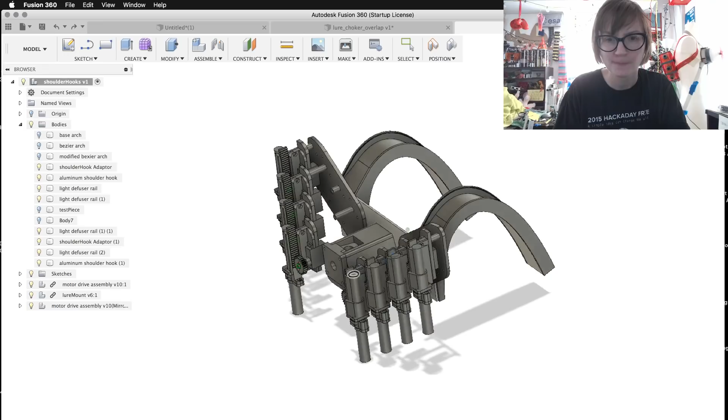Once I start printing parts of this and have enough to show, I'll post pictures on Twitter. Until then, I have other things queued up for the printer to make. I'm making another set of four rack and pinion assemblies over the next day or two. After that, I'll probably start printing those shoulder hook parts and at least one stand-in mounting plate I can tentatively connect this to, and that mount piece for the lure, that big stock thing over there somewhere. I threw the link in Discord, but I'll put it up again here.